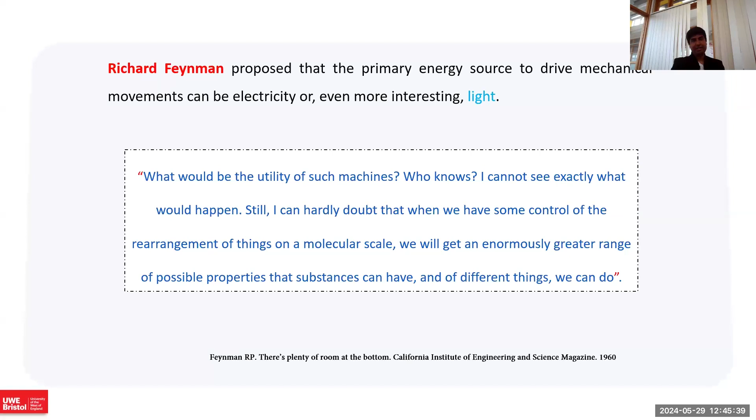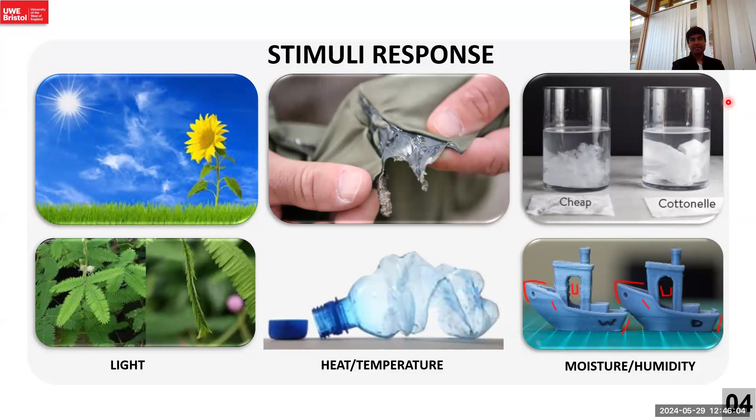I would like to highlight a few stimuli found in nature and also that we can engineer ourselves. The most famous are light, heat, moisture, and also electricity, magnetism, and chemicals. These are the stimuli that can initiate some kind of response within a material.

If we talk about actuators out there which can be controlled by external stimuli, we can classify them mainly into two broad categories. One is organic, comprising polymers and elastomers, and the other class is inorganic, comprising metals and ceramics. And there is a combination of these two, organic and inorganic, such as CNT fibers and yarns. But my work is basically around polymers and some composite materials, so I will talk only about these categories.

The whole actuator class is basically derived from the concept of the natural muscle of the human body that is controlled and actuated to perform different tasks of our body.

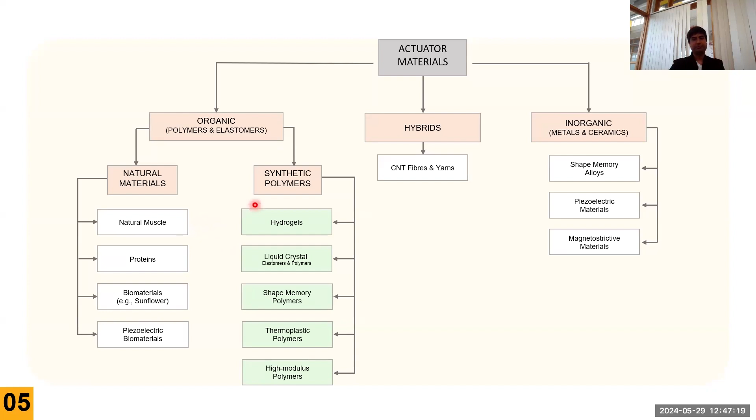So the problem with the existing actuators, although there are so many out there at the moment, is that they can produce actuations which cannot be reverted back. I mean to say, these are not reversible, or if they are reversible, they lose some properties when getting back to their original position. Or they are very slow, not rapid, and most of them are not recyclable. The materials and processes that we're using are not reproducible or recyclable.

The best possible characteristic of a good actuator is that the response should be rapid. It should be reversible so that we can use it again and again. And also it should be simple, easily available, and recyclable. These are the characteristics that should be there for an ideal actuator.

On the basis of the existing theory, we found out that there is a scope to produce an actuator which is ideally an ancillary-free actuator, because actuators like SMA, CNT-based actuators, and ceramics-based actuators are very good in terms of mechanical deformation, but they are very complex. They require so many ancillaries that make them not so ideal for use in some applications. So there is a scope for ancillary-free actuators.

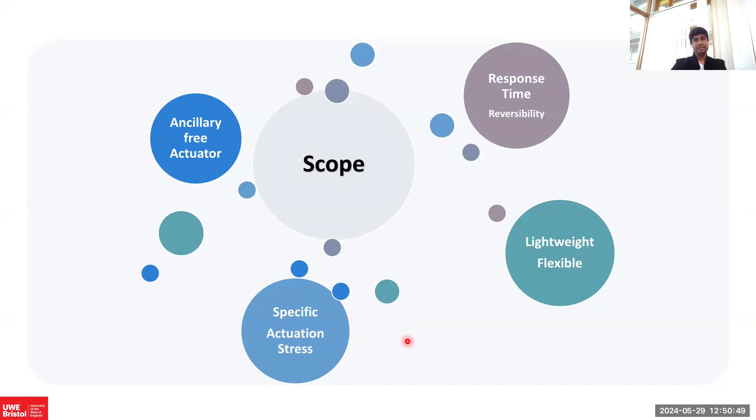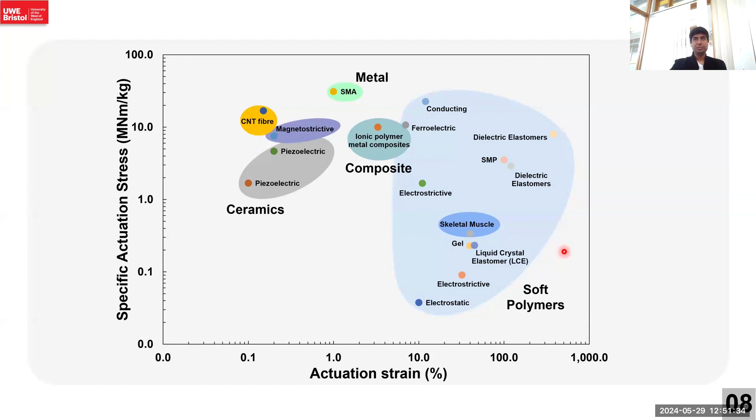On the basis of that, we established a chart to get a clear picture of what we have at the moment. On this chart, the actuator families can be classified into different materials, for example metals, ceramics, composites, and soft polymer actuators. In particular, all of the polymer actuators out there are soft polymers. They focus more on actuation strain rather than actuation stress, or they use some kind of medium, for example they need a solution to be activated and cannot be used on their own.

So we thought that there is a place for a polymer actuator which is not soft but stiff, while also keeping its flexibility. And in order to get rid of the ancillaries involved in SMA and ceramic actuators, we need to address them remotely. These should be industry viable, recyclable, commercially available materials which are not very costly, easily accessible and usable. All of these became the basis of our work of creating stiff polymer actuators.

So moving on to the recipe of what we wanted to create. It basically comprises three ingredients. The first and foremost is light, because we wanted to actuate the material remotely without creating any link to it, and what better source than light. Light is also interesting because it can be modulated in terms of wavelength, intensity, and polarization direction. Light is easily available; we can even actuate materials using sunlight. Using light as a stimulus provides the advantage of creating an ancillary-free actuator.

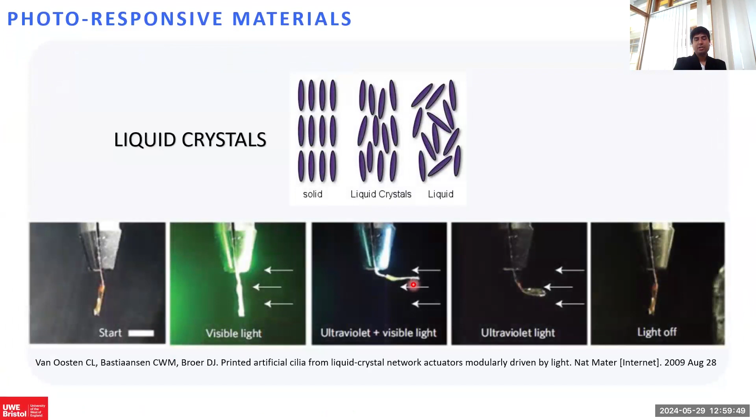The problem with azobenzene is that it is good with soft materials like liquid crystals and polymers like hydrogels, in which the materials are soft. But since we are aiming to create actuation in stiff polymer actuators, the trans to cis transformation might not work well with stiff polymers, although scientists believe that it is possible, and that stiff polymer actuation is basically caused by the transformation of trans to cis state. But that would not be the case.

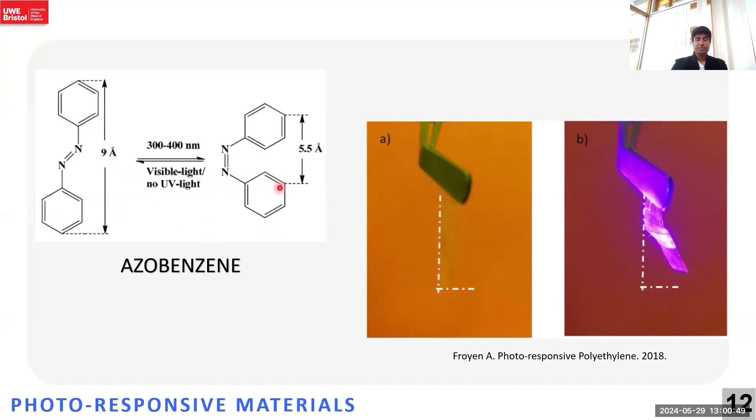And one of our research group members was working on this and found that this is not only because of the isomerization of the azobenzene, but also because of the photothermal generation of heat when the trans state is being converted into cis state. So moving forward, we believe that benzotriazole, BZT, is an ideal material to be used as a photoresponsive agent within polyethylene.

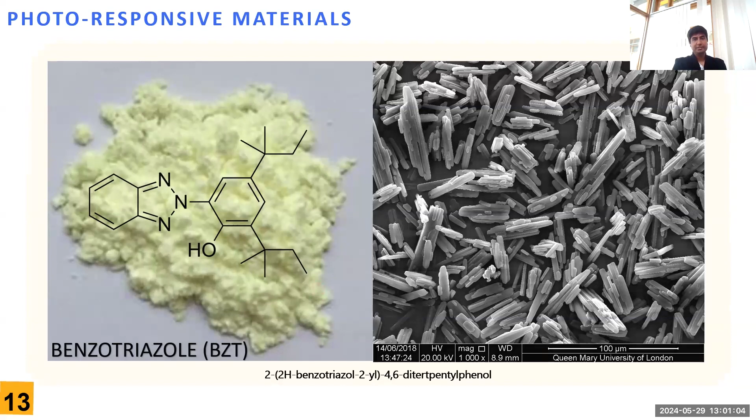So in the following slides, I will talk about some of our research work, starting with high density polyethylene, because this process is very simple. We can produce high density polyethylene films or filaments or fibers using melt processing, which is a very simple process. So we started with creating high density polyethylene embedded with BZT. We used twin screw extruders to create pellets, and then a single screw extruder to create films.

These films contain benzotriazole in different concentrations because we wanted to characterize the different properties of the materials to get the highest possible actuation stress at that time. So what is happening when we illuminate the benzotriazole-containing polyethylene films with UV light?

I wanted to mention that the benzotriazole absorbs maximum light at a 365 nanometer wavelength of UV light. So we use a light with that wavelength. The electromagnetic waves are absorbed by the benzotriazole, and in return, it generates phonons, which is a vibrational

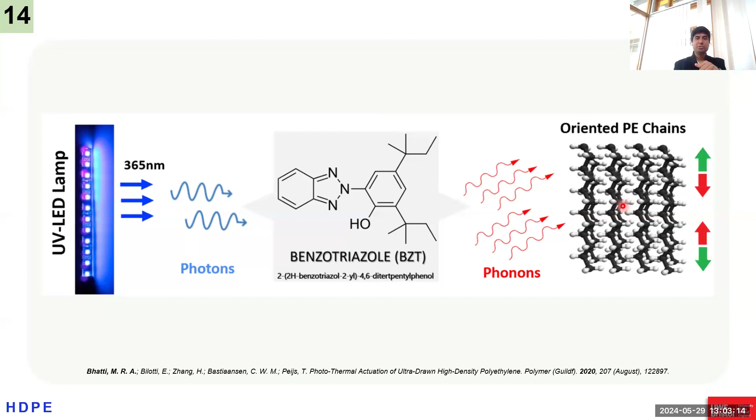And if we clamp these films in a tensile tester, restraining them from contracting, the response will be in terms of actuation stress. So we devised a simple experiment of tensile relaxation. In that experiment, the strain is kept at a constant level, and because of the viscoelastic nature of polyethylene, the material tends to relax in terms of tensile stress.

But when these films containing BZT are illuminated with UV light, they respond in terms of actuation stress upon UV radiation. As you can observe here, we illuminate the polyethylene films with an interval of 10 seconds. As soon as the light is illuminated, a short peak is observed, which is an actuation stress. It is very rapid, it is reversible, and it can be generated as long as we want.

We tried different concentrations of BZT within polyethylene, and for each concentration the response was there, even at a very small concentration of 1% BZT. And we can also see that as the concentration of BZT is increased, the response also increases.

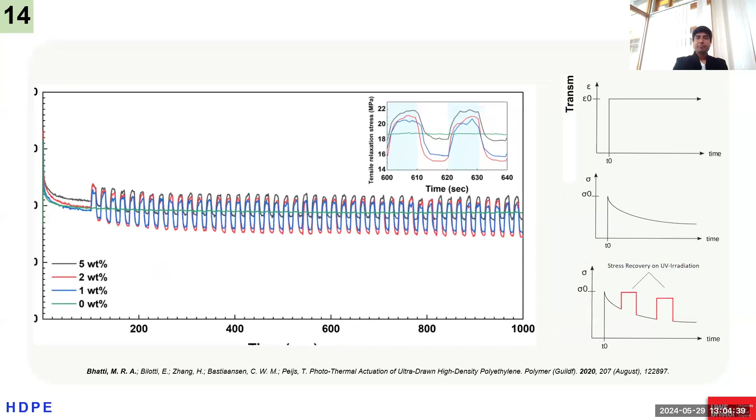But the problem with the higher concentration was that we were unable to illuminate the whole film. With the increase in BZT concentration, since the light photons are absorbed by the BZT, more BZT in the film means more absorption, and technically there will be a dark region behind the film through the thickness. That means either the light does not reach that point because of the high film thickness, or a higher concentration of BZT restricts it from getting to the far end of the film. That means there is a thermal gradient generated within the films.

That gave us a basis to think that we should create a thinner film, because at a thinner film level, maybe we can eliminate the thermal gradient and generate a higher actuation stress. But the problem with HDPE is that we cannot draw the films beyond a certain draw ratio. We tried up to a draw ratio of 20, but at those draw ratios microvoids were generated, especially in the vertical direction compared to the chain orientation direction, which reduces the transparency and also the strength of the film.

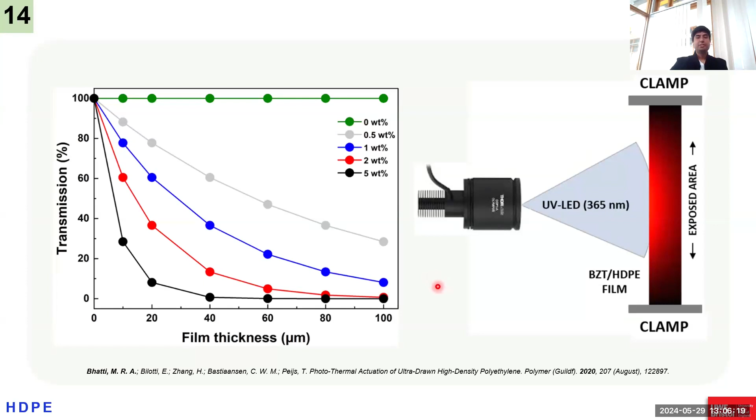So we thought of using another material, ultra-high molecular weight polyethylene, but the process is different. It is not melt processed because of the high molecular weight. We used a gel casting process in which ultra-high molecular weight polyethylene powder is mixed with xylene, a solvent, then BZT is added, then it is gel cast into a sheet, dried, and the sheets are drawn later on to get a high draw ratio.

Using ultra-high molecular weight polyethylene, we were able to create draw ratios of 40, 60, and 80. We were aiming for a higher actuation stress, which was actually the case: we successfully got a higher actuation stress just by increasing the draw ratio, bringing the film thickness down. But while we anticipated that increasing the draw ratio would keep increasing the actuation stress, to our surprise we got a plateau. We did not get a regular steep curve.

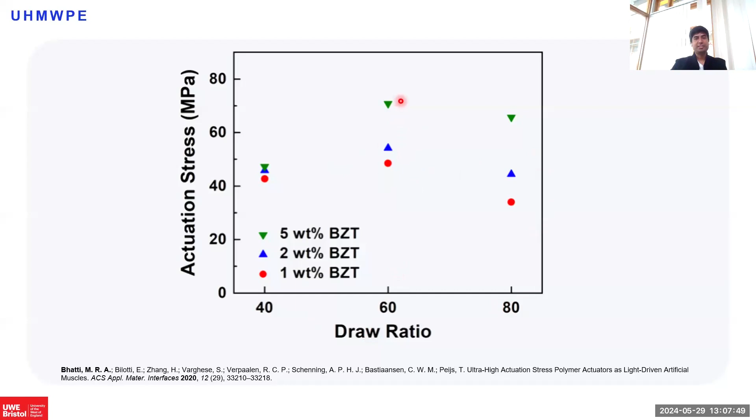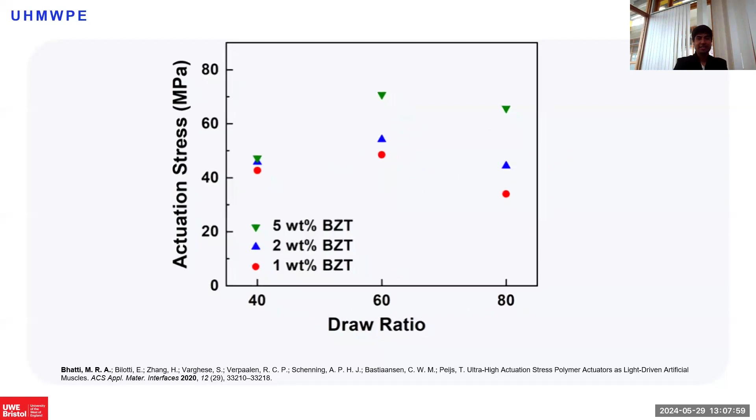We got an optimum value. At a draw ratio of 60, we get the maximum possible actuation stress with these films. And as we increased the draw ratio further, the actuation stress decreased, which was a surprise for us at that moment.

It's important to mention here that the actuation stress is generated because of the heat generated by the BZT after absorbing UV light and converting it into heat energy, and we can see the heat signatures. These are infrared images of the films, and as soon as the light is turned on, the film samples heat up, and this heat causes the material to contract. But we limit the contraction by holding the films at both ends, thus increasing the actuation stress, which we can record.

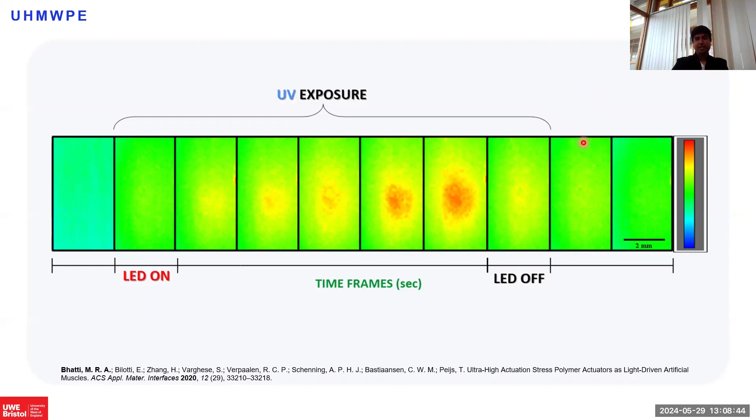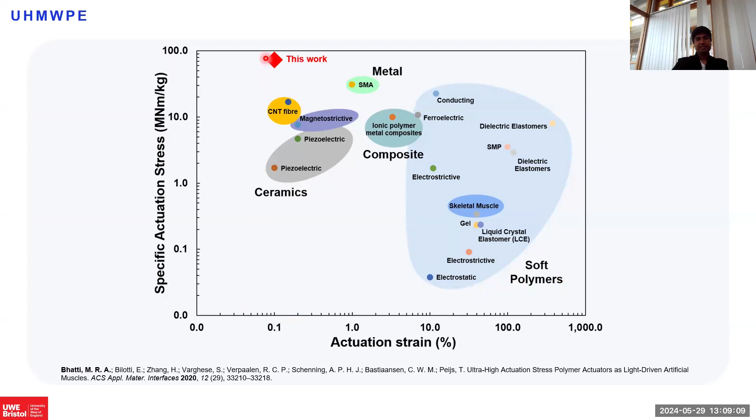So successfully, we produce a very high specific actuation stress thanks to the low density of polyethylene. We managed to get up to 70 megapascal of actuation stress using BZT, polyethylene, and light. And as you can see, we are able to create stiff polymer actuators with a very high specific actuation stress. But the question remains that we were clueless at that moment why the actuation stress gets down at a higher draw ratio.

I would like to mention over here that the maximum draw ratio for any polymer material depends on the molecular weight of the polymer, the concentration of the polymers within the solution, and also on the processing route. So the maximum possible draw ratio with our parameters using ultra-high molecular weight polyethylene was around 100. So we thought that 80 is very much closer to the maximum attainable draw ratio.

And when we are reaching the maximum attainable draw ratio, although the Young's modulus is on the higher side, the negative coefficient of thermal expansion is on the lower side. So we are achieving a higher Young's modulus, but we are also getting a lower coefficient of thermal expansion, which we were thinking at that point is the base of getting actuation stress. But since these are counteracting each other, we thought that there should be an optimum value, which we observe at a draw ratio of 60.

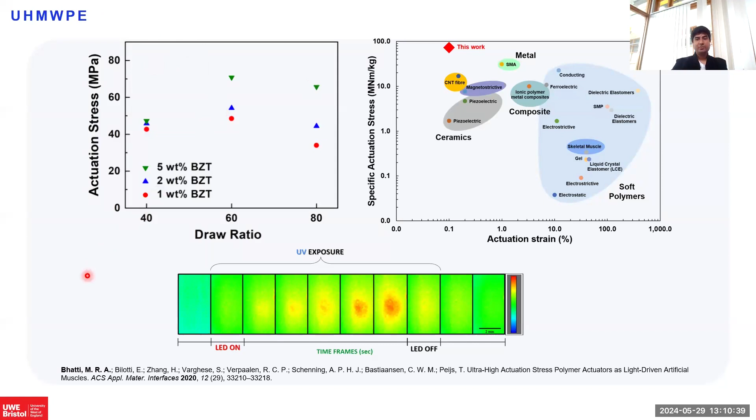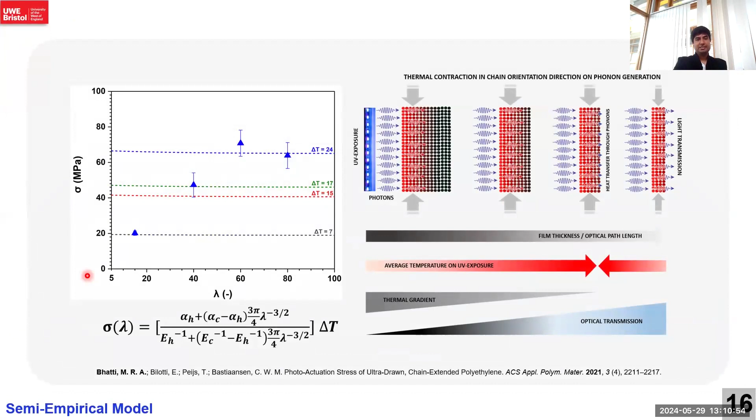But to analyze it further, what is the reason behind that? We devised a semi-empirical model. We theoretically analyzed what is happening at a molecular scale, at a polymer level. So let's consider different types of films in terms of thickness and in terms of draw ratio. Let's say a draw ratio of 20, 40, 60, and 80, or you can also say different film thicknesses like 30, 10, and maybe 8 or 5. These are the molecular arrays within the polymer, or the polymeric chains, and we have BZT in there.

When the film thickness is higher, the photons are unable to reach the back end of the film, leaving it in the dark, and it does not harness the true potential of the BZT within the film, because the BZT present at the back of the film is not being utilized. So we are not getting the actuation stress that we should get because of the thermal gradient generated. And as we reduce the film thickness, the actuation stress increases. At some point we reach an optimum level where all of the BZT within the film is being utilized, converting into actuation stress, and there is no thermal gradient in theory.

But as soon as we move forward, making it much thinner at a higher draw ratio, the light passes through the material without being utilized. For example, the photon energy is not being utilized properly. So there should be a balance between all these parameters, like the concentration of BZT, the light intensity, the film thickness, and also the Young's modulus of polyethylene and coefficient of thermal expansion.

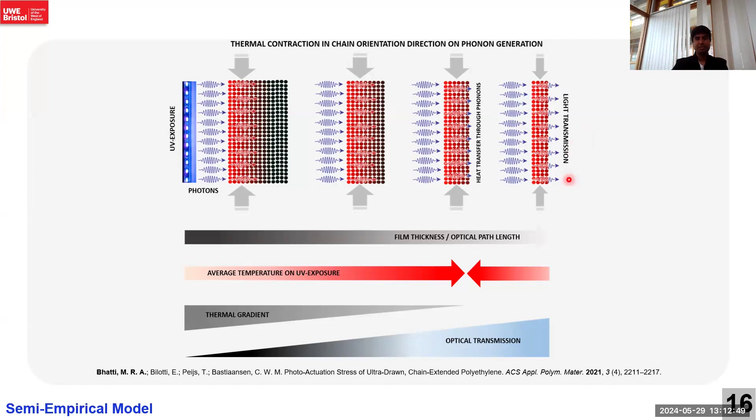So at that moment, we realized that we are not considering a very important factor, which is delta T. Delta T is the difference of temperature between the illuminated and non-illuminated state of the polymers. So by considering that point, we thought that because of the counter effect of Young's modulus and negative coefficient of thermal expansion of polyethylene, the effect of draw ratio on the actuation stress is very minimal, and it's like a straight line. But the effect of delta T is there. The higher temperature difference within the polymeric film, because of the heat generated, actually creates the actuation stress.

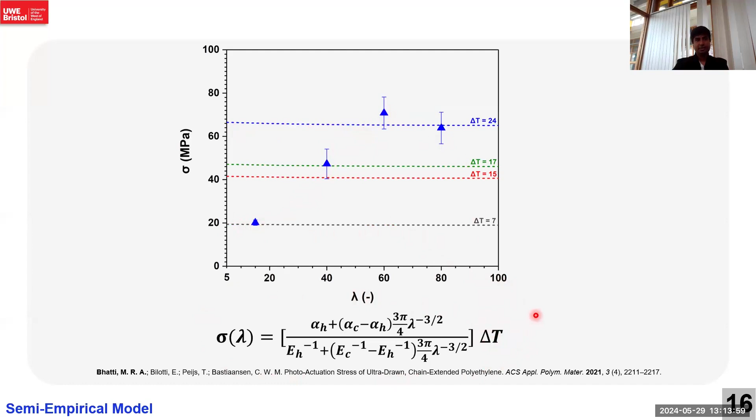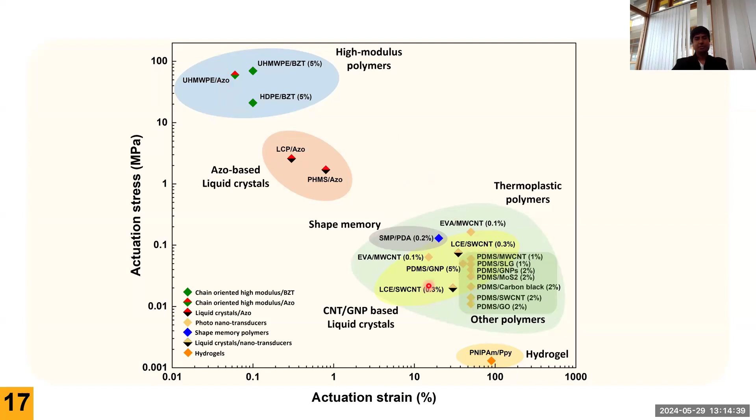So we got these values with respect to delta T, and we devised this equation that actually fits very well with the actual results, and it coincides with the theoretical results. So we modified the initial chart of our actuators, but in this chart you are only seeing the polymers. After our work, we were able to generate polymer actuators that range from a very high actuation strain to a very high actuation stress, depending on the applications, utilizing any kind of polymeric materials, which was quite astonishing.

So moving forward, based on our research work, we found out that polyethylene does not have a very high melting temperature. So there is a term used, alpha relaxation temperature. So we see that if we increase the concentration of BZT, there will be an increase in the actuation stress. One might think, why can we not go further than 5% of BZT?

So increasing the BZT can generate the thermal gradient, or it can also increase the temperature within the polymeric film, and it can go beyond the alpha relaxation temperature. Beyond that, the polymer chains start to relax. That means they are not going to contract as the temperature is increasing, and if the temperature goes much higher, the chains can also be melted.

So it is a limit in terms of polyethylene, but that means we can use other materials, because we saw that lambda, the draw ratio, is not playing a very significant role here. So we can use polymeric materials with high temperature resistant properties, such as polyamide, polyester, that can resist heat much better as compared to polyethylene, and at a lower draw ratio. So we can explore that.

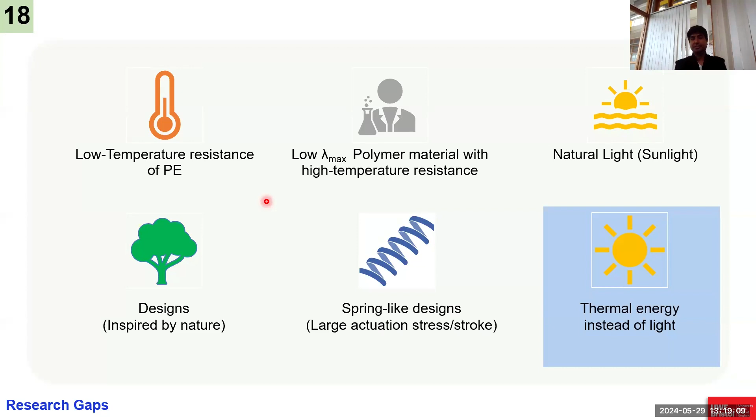And because the heat is generated within the polymeric film, which actually creates these actuations, we can also generate the same phenomena using thermal energy instead of light. But this might be limited in certain applications. For example, in some electronics, if we need localized actuations, we do not want to heat up the whole system. This might be limited, but there is a possibility. And we actually checked using a DMA machine, a dynamic mechanical analyzer, and found out that similar actuation stress can also be attained using thermal energy rather than light energy.

This is what I wanted to discuss, but if you have some time, I would like to discuss very briefly what I'm doing these days, and I'm really interested to talk about that. I will just take 5 more minutes.

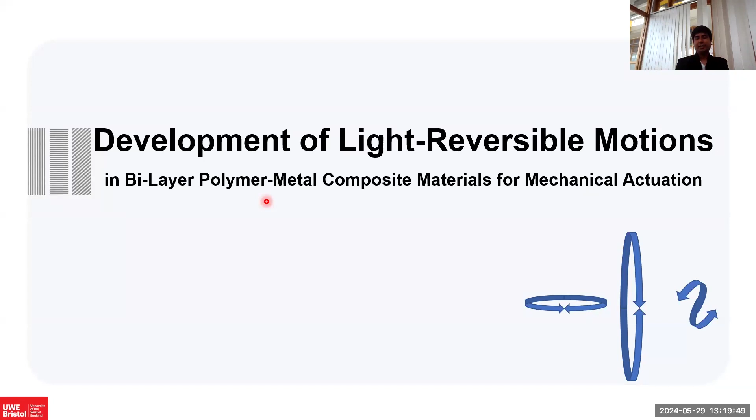It is the development of light reversible motions in bilayer polymer metal composites. Since we found out that across the film thickness we have a thermal gradient, the light is either not being used or being passed through the material without being used. So from that, we thought that we have to create a barrier at the back end of the film using a fully reflective material like silver, a material which can half absorb and half reflect the light, such as gold, and also a fully absorbing material such as carbon.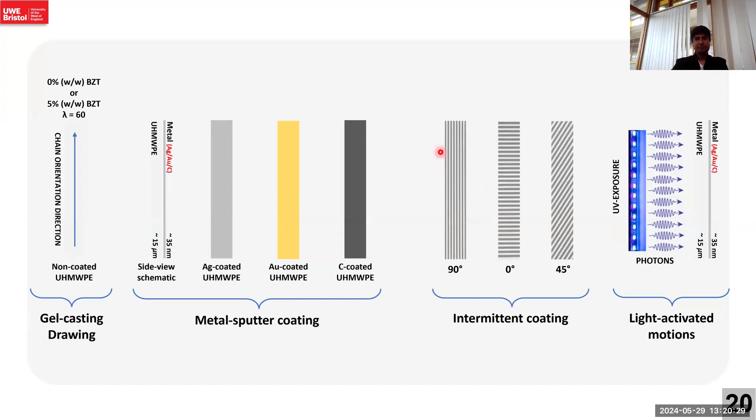And we also devised some patterns within the film so that we can generate different mechanical deformations like bending and twisting using different patterns of the coated films. So what we were expecting: if we create a metallic layer on the back end of the film, because oriented polyethylene has a property of thermal contraction, when heat is there the polymer chains tend to contract. But the metal coating has a positive coefficient of thermal expansion, so upon heating, it will actually expand.

So there will be a gradient of thermal expansion and contraction, which tends to create a bending or curve in the film. And what we are anticipating is that if the light passes through the film, because of these metal coatings, such as silver, these light rays or photons will be reflected back into the film, thus increasing the actuation stress.

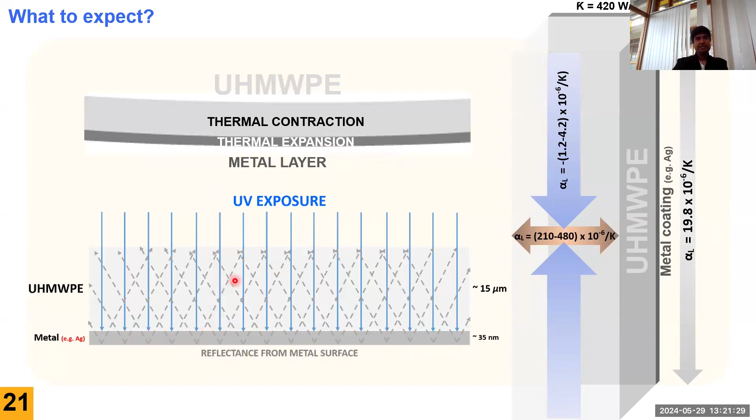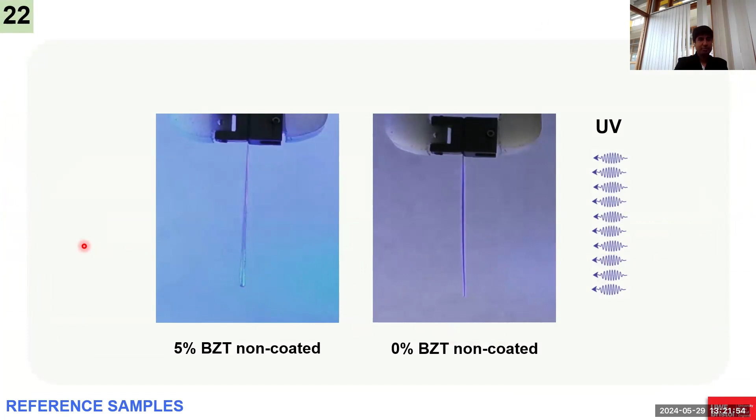So these are some of our reference samples in which we have used 0% and 5% BZT, which were non-coated, and we illuminate that with the light. With the 5% and the non-coated, we hardly observe some kind of deformations within the film. This is purely because the film is very much stiffer, and also we are holding it from one end with

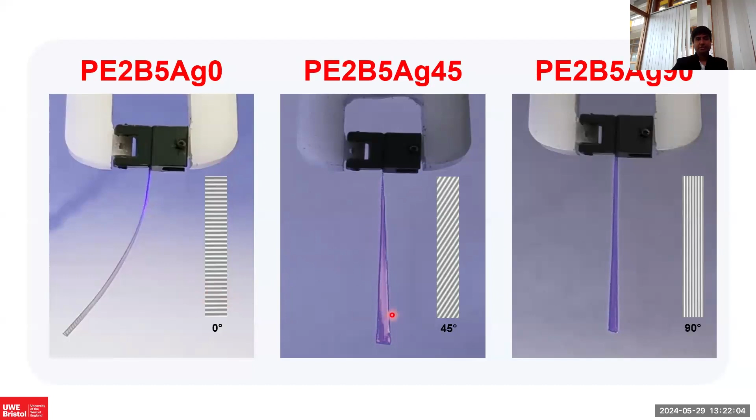the clamp. But if we use different patterns like 0 degree, 45 degree, and 90 degree, and illuminate it with the UV light, we experience some kind of deformations like twisting, like bending within the polymeric film. But again, these are not very promising results.

What we were anticipating is something similar to liquid crystals, but again, we are comparing a soft polymer with a stiff polymer, which might not be possible. So we did observe some of the deformations, but these are not very significant. What we can do, we can continue working on that, improving different parameters and see what happens.

Or we can, rather than using the metallic strip, because the metal is also very stiff, restricting the polymer from mechanical deformation, bending, or stuff like that, use an isotropic film without being drawn. So putting it on the backside, joining them together and see what happens, because the difference between the negative coefficient of thermal expansion and positive coefficient of thermal expansion of anisotropic and isotropic polymer films is like 10 to 20 times.

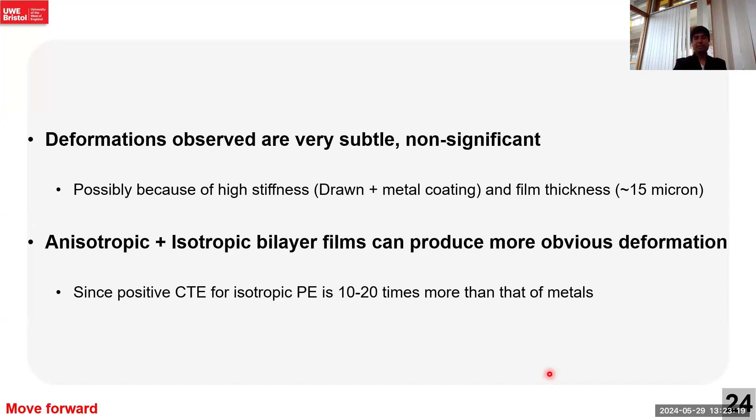This was another project I'm working on, creating a microporous yarn.

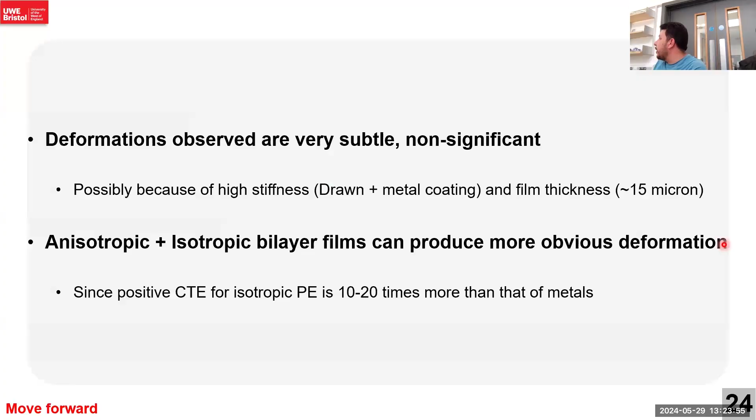Thank you, Dr. Rehan. I have a question. It might be silly, but I was thinking, is this reversible or not? Like we saw that with light, it gets bending, but how does it regain its original position? Have you tested such kind of things or not? Yeah, I would like to come back to the slide. I'm sorry, I have to get back. Yeah,

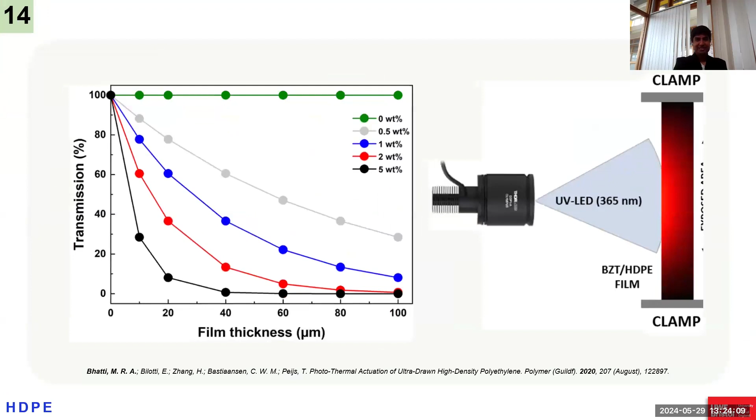When we orient these polymers, the amorphous regions are being converted into crystalline regions. The crystallinity of the polymer is increasing. So whether we are talking about high density polyethylene at a draw ratio of 15 probably, or ultra high molecular weight polyethylene at a draw ratio of 60 or 80, the only difference between these two is the concentration of crystalline and amorphous regions. So crystallinity increases as we increase the draw ratio.

But at any point, the crystalline regions, the lamellae, are interconnected with the taut tie molecules, which are elongated amorphous regions. So when we illuminate the polymers with the light and heat is generated, these taut tie molecules tend to contract because of the negative thermal coefficient. And these are entropy-driven conformations. So when we remove the light source, because of the entropy, these tend to get back to their original state, because the crystalline regions on top and bottom are at their same position. So the entropy tends to get them back to their original position.